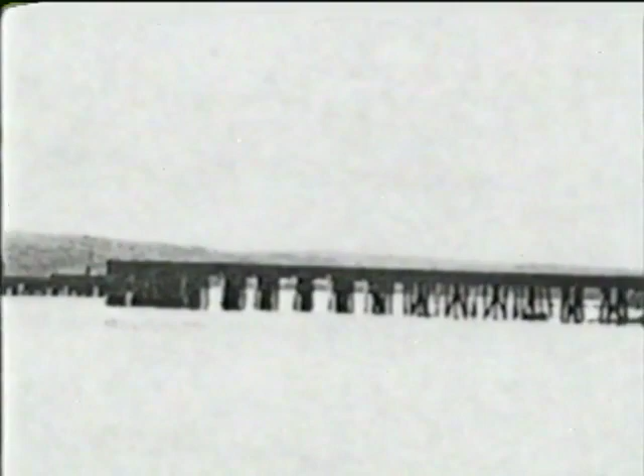The second bridge was built in 1892. It lasted hardly a year. There was no storm this time, no roaring wind. The bridge simply collapsed on a calm July night. The builders had tried to drive bridge pilings into solid bedrock.

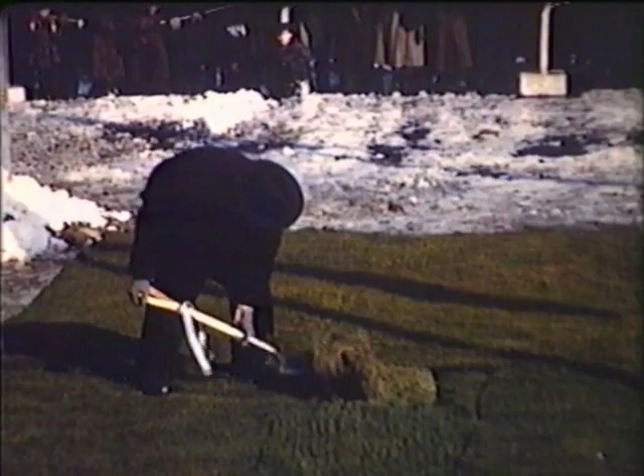It was not until after World War II that plans were laid for building a third harbour bridge. Angus L. MacDonald was the man who recognized the need for it. Post-war Halifax was growing, and harbour ferries could not handle the increase in traffic.

Returning veterans from the war wanted the good life that they had dreamed about when they were slogging through mud in Europe or sailing the raging North Atlantic in supply convoys. They wanted a good job, a home of their own, and an automobile.

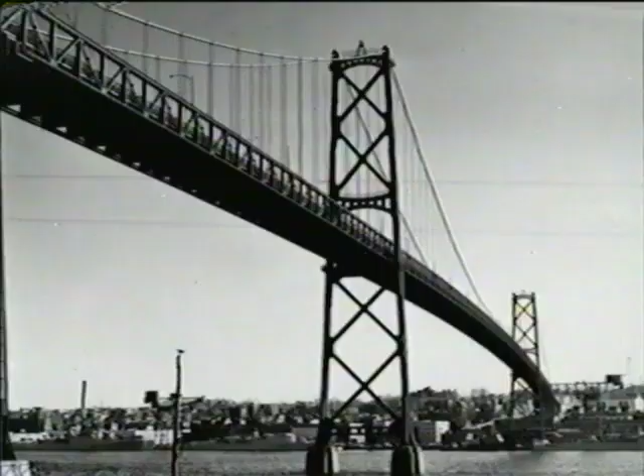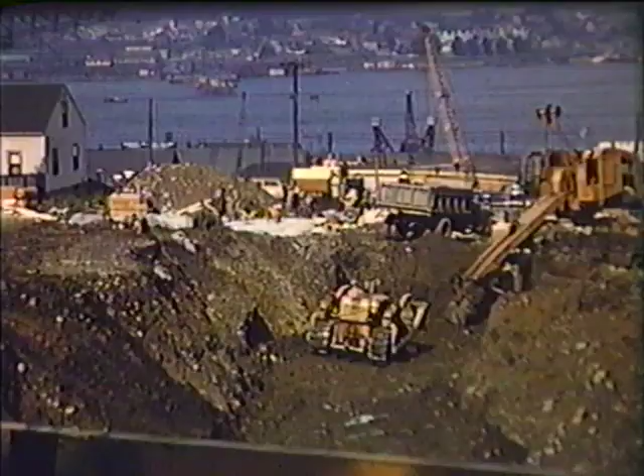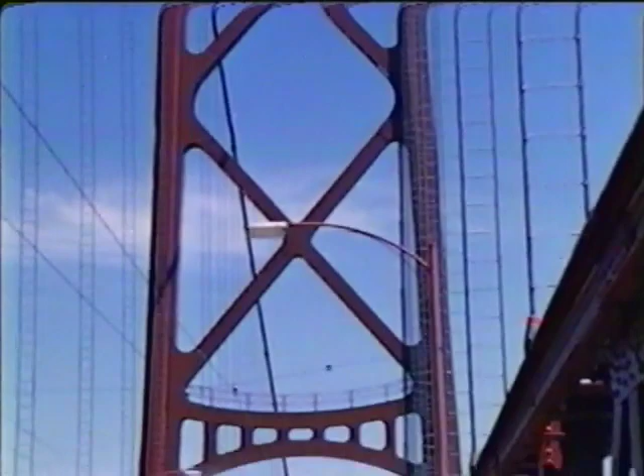For the generation still shaken by the Great Depression and the Second World War, the Angus L. MacDonald Bridge was to become a symbol of hope, a sign in the sky that they could span the tragedy and destruction of the past 2 decades and build a secure and prosperous future. But building the bridge would not be easy. And before it was finished, the Angus L. MacDonald Bridge would cost 6 men their lives.

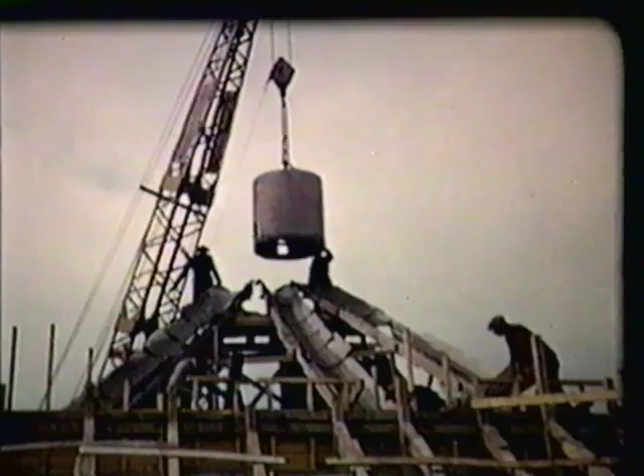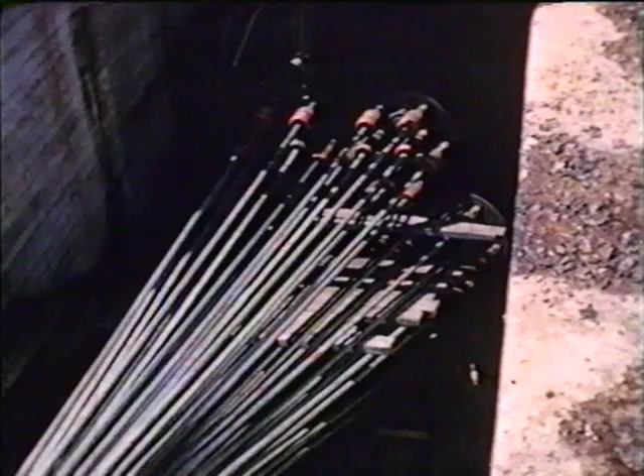The foundation was first. 2 massive concrete blocks, each weighing 20,000 tons, anchored the bridge on both sides. And in the case of a suspension bridge, the massive anchorages for the cables are sort of like icebergs. You don't see half of the mass of the anchorage when you look at them now, because half of it at least is underground. So they are very massive indeed to resist a very heavy pull.

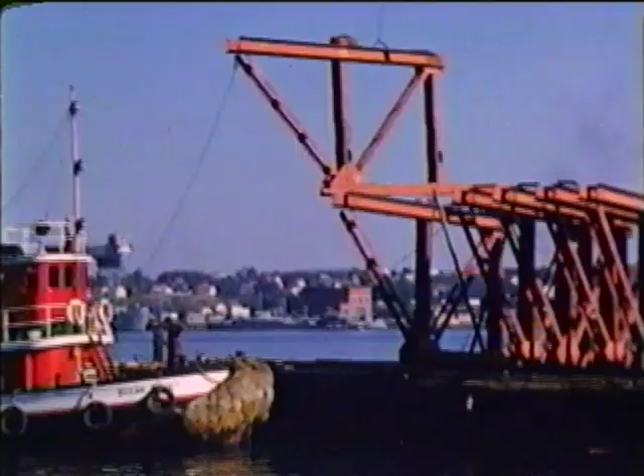People stood in awe to watch steel beams flung out over the water and then set in place and riveted. One span after the next extended from both sides at once. They were like arms reaching out for a handshake. So the bridge suddenly sprouted in 1954.

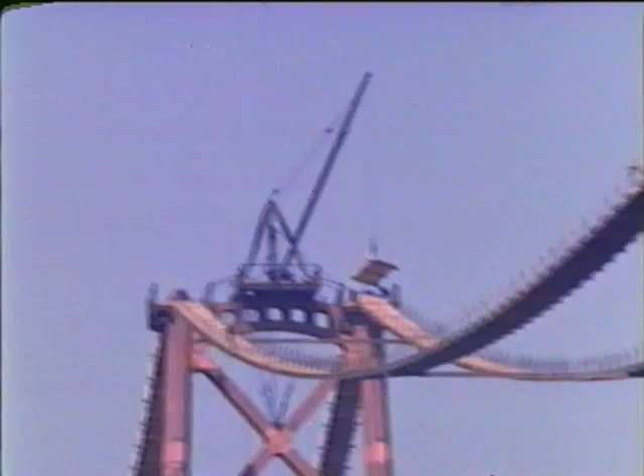By the late summer, we had the towers up and started putting the cables up. And that took about 3 weeks to put the cables in place. And then we started putting up the trusses, and the bridge took shape in about 6 weeks.

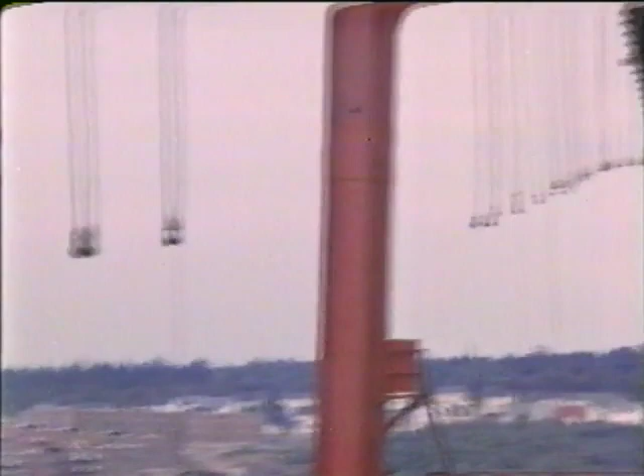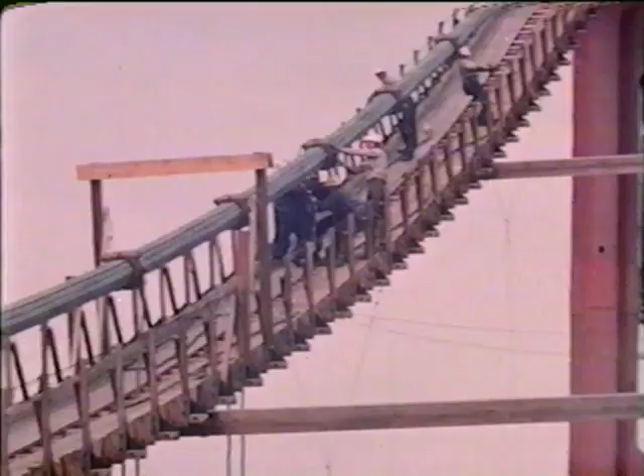Two main towers, each 300 feet tall, were strung with 72 miles of steel strands squeezed into these steel cables. Each cable contained 61 strands. The towers and piers carry the dead load of 75,000 tons of concrete and 8,200 tons of steel.

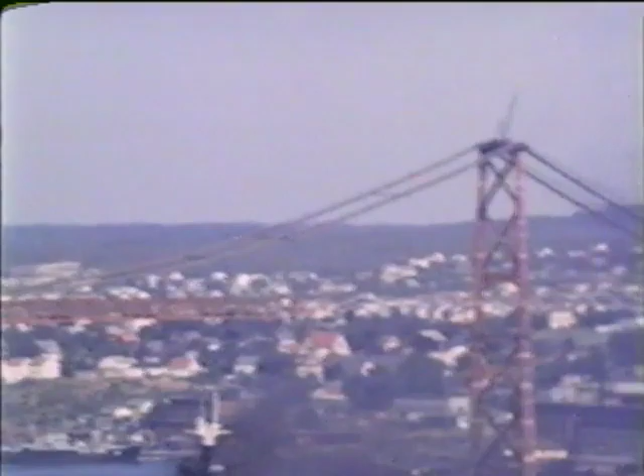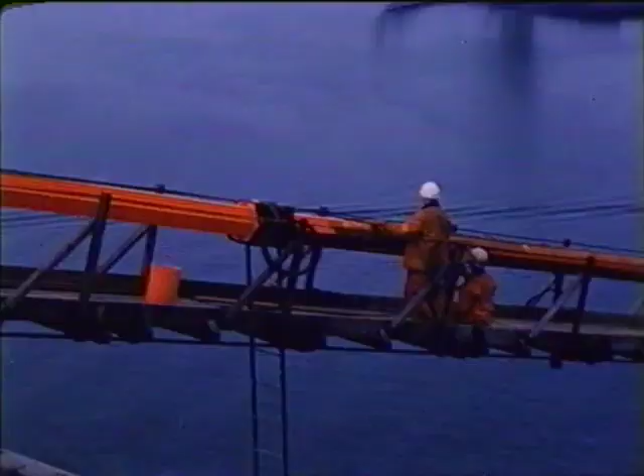Yet for all that weight, the MacDonald Bridge seems suspended in the wind as it stretches nearly a mile from shore to shore. Hugh Prattley was on site the whole time of its building. He was even up here with the ironworkers. For him, this was the top of the world.

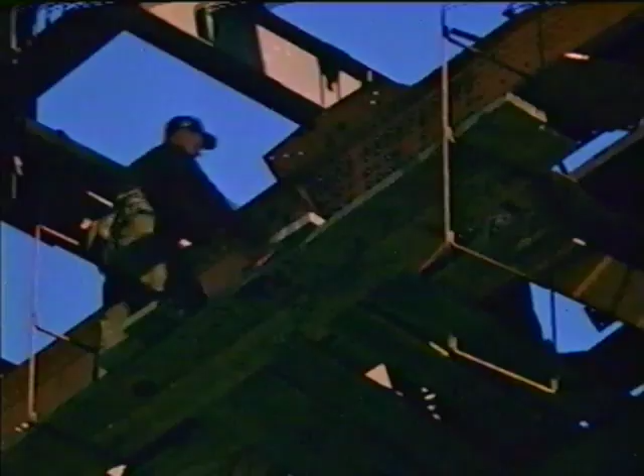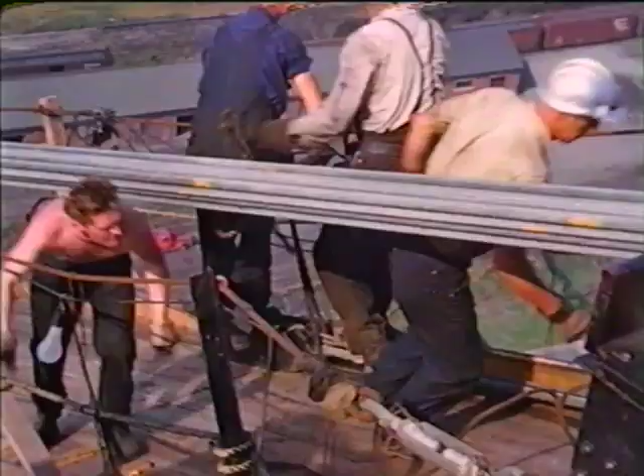From ground level, it looked as though these men were riding girders and trusses across the sky. They were iron men who pulled muscle from bone with the climbing and scaling to the tops of these towers. They were tough, and they were fearless. On July 3rd, 1954, a random wind caught one of them and threw him to his death 200 feet below. His name was Jean-Marie Boulanger.

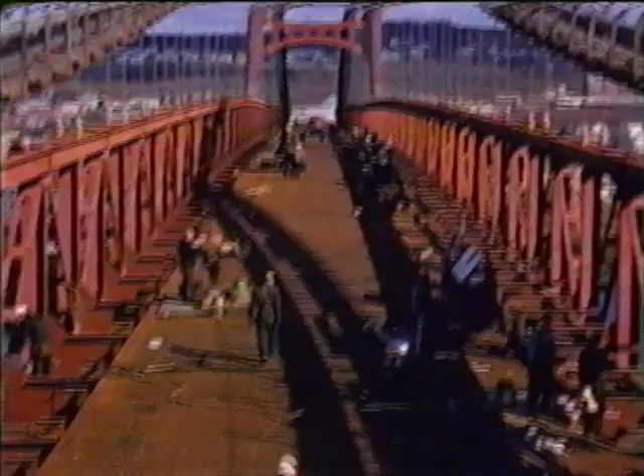But I actually witnessed one man hanging on for dear life because the catwalk was twisting badly, and eventually it threw him off. He couldn't hold on, and I saw him fall right into the harbor. It was a terrible experience for me to witness that. And of course, he was killed instantly, unfortunately, but it was best for him that it was instantaneous, I guess. By the time the steel grid deck was set in place, 5 more men would lose their lives in building this bridge.

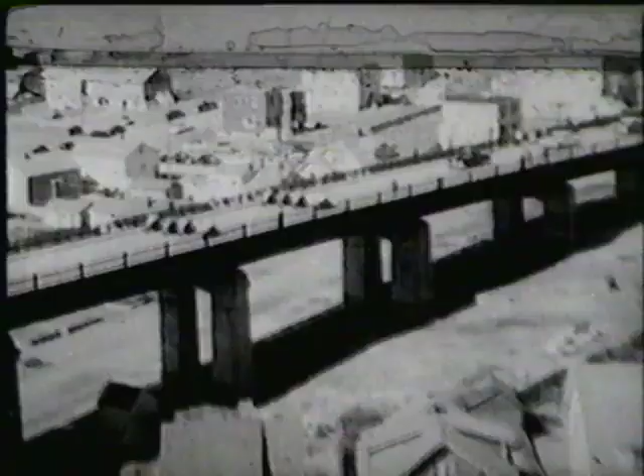On April 2nd, 1955, the Angus L. MacDonald Bridge was officially opened. Almost at once, the MacDonald Bridge proved its financial worth. The estimate was we would get up to 1 million vehicles per annum by about the 3rd or 4th year. In fact, we had 2.5 million the first year. Over the next 40 years, the bridge became an old friend to both Halifax and Dartmouth. Often, it was the focal point for civic celebrations.

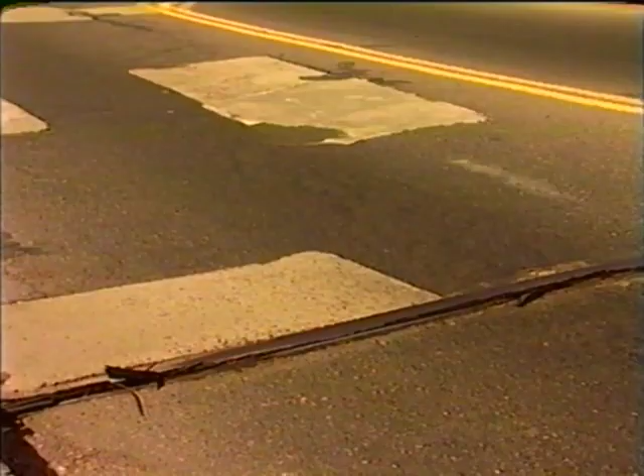Each day for 40 years, thousands and thousands of cars beat the pavement down to the steel decking. Time and the weather have worn the shine off the old bridge. During an annual inspection, the engineering firm O'Halloran Campbell determined that rust and corrosion have made the bridge a little frail and much in need of rejuvenation. The approach decks needed replacement.

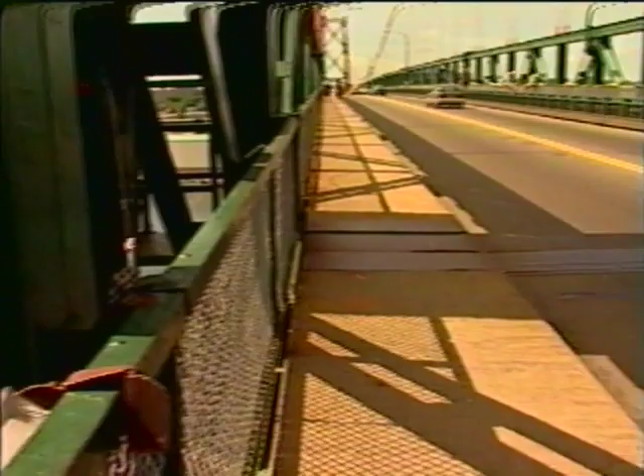So I began to think, well, if we're going to mess up the traffic, so to speak, by tearing up the approach decks and taking a year and a half or whatever length of time to complete the replacement of the approach decks, maybe we should do the 3rd lane because it had been talked about for years. The engineers determined there would be cost savings and time savings in expanding deck replacement into a 3rd lane project, which included the addition of a bikeway and a sidewalk. The engineering began in January 1996. And it'll actually be pre-surfaced.

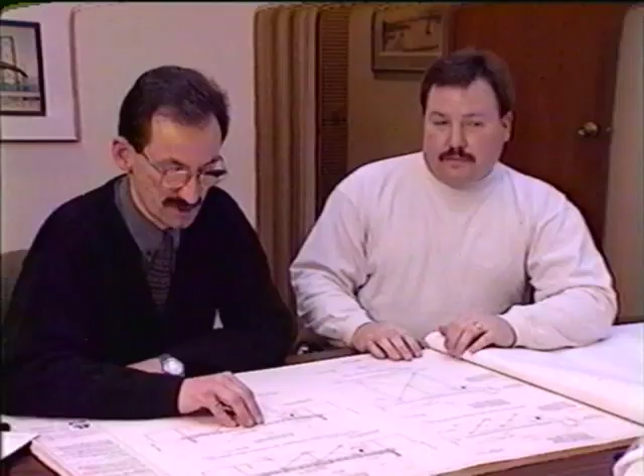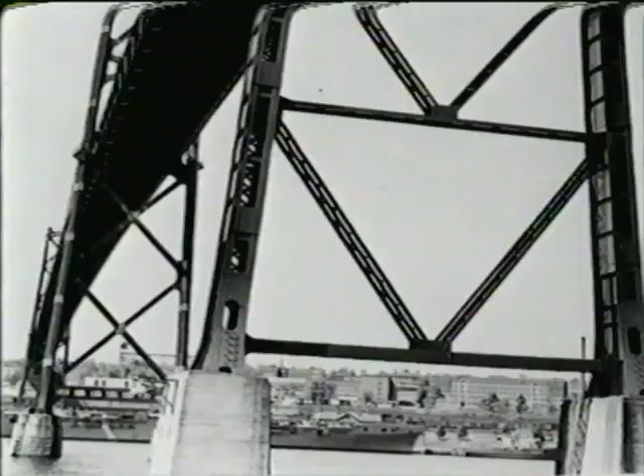There certainly were challenges on the 3rd lane project. One of the big challenges was how do we accommodate 3 lanes of traffic on the bridge from the old 2. That involves changes in loading. Load on a bridge is calculated as dead load and live load. Dead load is the load of the bridge itself, the concrete and steel. Live load is the traffic crossing the bridge. Together, they make up the total load the bridge was designed to carry.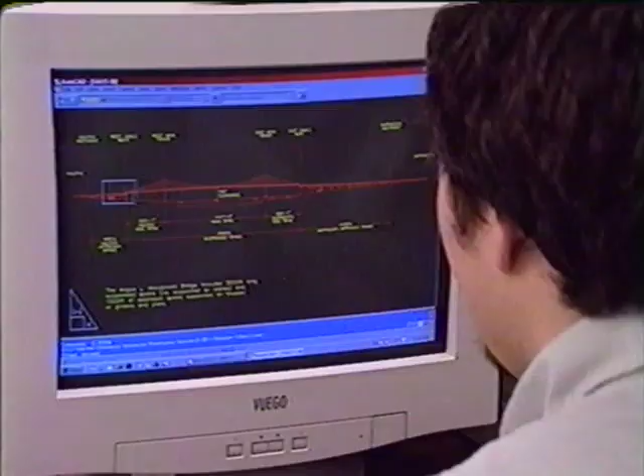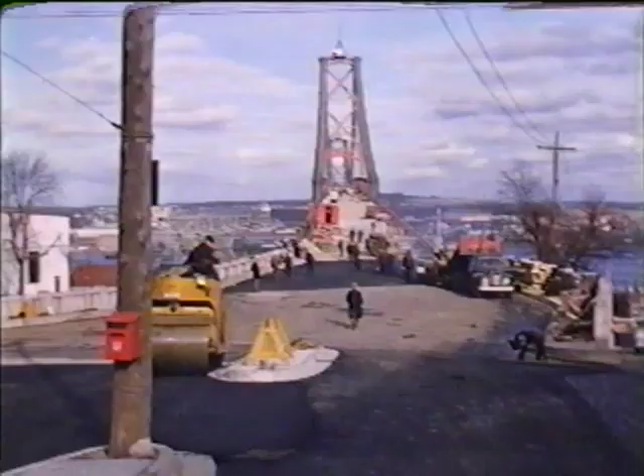O'Halloran Campbell had developed and engineered the method for adding an extra lane of traffic, as well as adding a bikeway and sidewalk without increasing the total load on the bridge. It sounds almost impossible. Now, in the case of this project, we had 3 advantages playing in our favor. The first was that when the bridge was designed in the early 1950s, it was designed for the normal mix of truck traffic. More recently, the approach roads, both on the Halifax side and the Dartmouth side to the MacDonald Bridge, were no longer designated truck routes, so the bridge was not used for normal large trucks. No trucks means that the bridge carries a lot less live load than it was designed to carry.

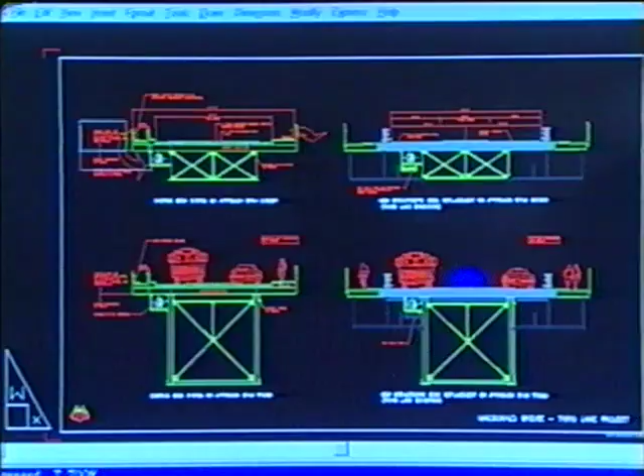The second item in our favor was that whereas the MacDonald Bridge was designed to take a 30-inch diameter water main, when the water main was installed, which was in 1971, it was installed as a 24-inch water main, so it meant that the load from the water main was less than it had been designed to be. In very simple terms, the engineers traded the calculated weight of truck traffic on the bridge and water through the water main for the extra weight of the third lane, as well as the bikeway and sidewalk.

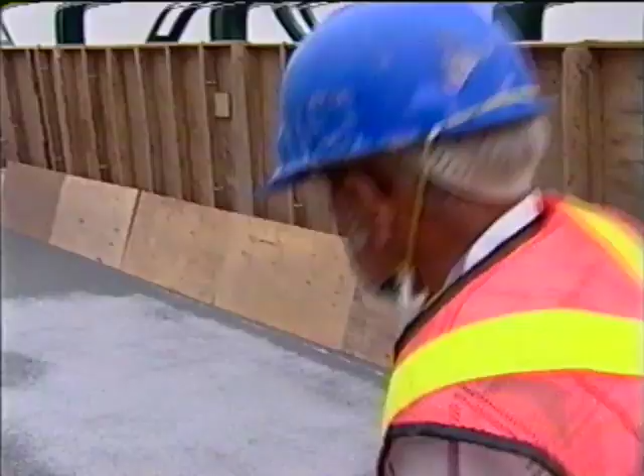A third advantage playing into the project's favor was the engineers' decision to use a lightweight epoxy wearing surface instead of the 1-inch heavier asphalt. Had we not been able to use those lightweight wearing surfaces, and for instance, had we had to accommodate truck traffic, then we would not have been able to move forward with the third lane project. Another factor was the use of a lightweight construction material called an orthotropic steel plate.

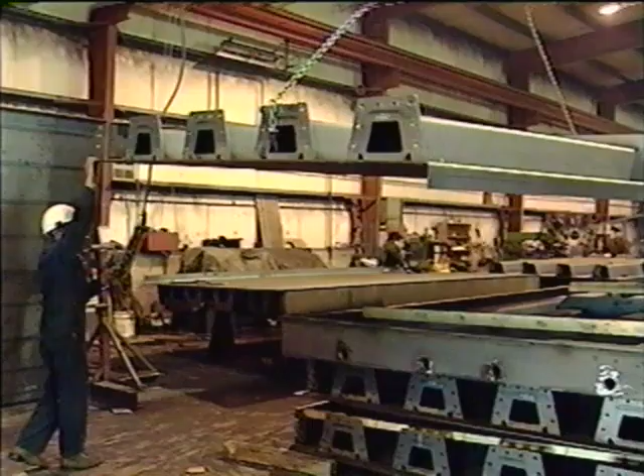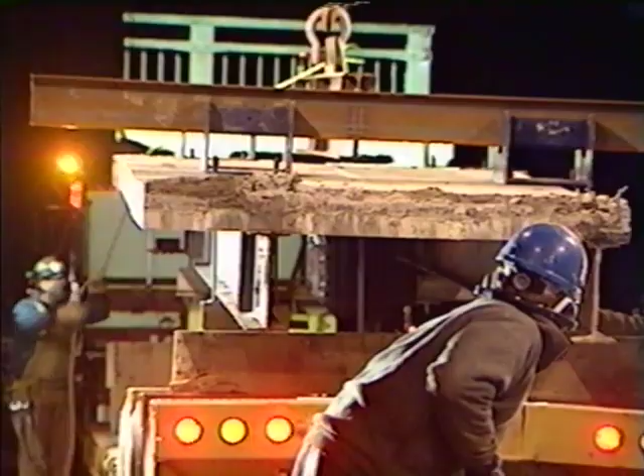In simple terms, it's a near horizontal steel plate, which is about 1/2 inch thick, and it has stiffening ribs running underneath it in the direction longitudinal to the bridge, that is, with the direction of traffic. The orthotropic steel plate allowed the engineers to design deck replacement one panel at a time. This new lightweight orthotropic steel plate would be used in the roadway area on the approach spans and on the

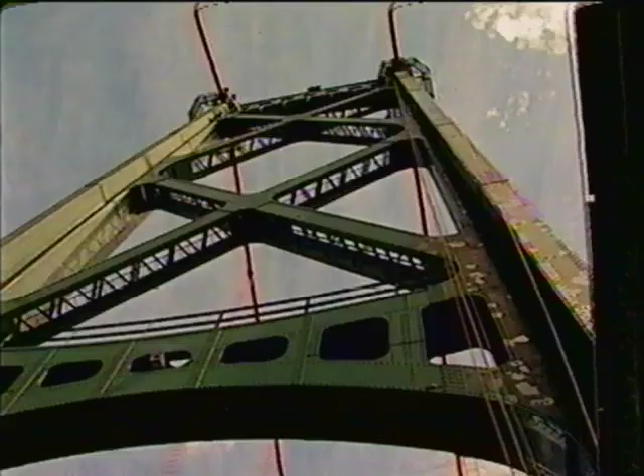sidewalk and bikeway. The next engineering challenge was this: where to put the third lane of traffic and where to put the bikeway and sidewalk. On a suspension bridge, the width between the stiffening trusses is fixed. To the average eye, there just isn't enough room to accommodate a third lane. O'Halloran and Campbell, however, did not see it that way.

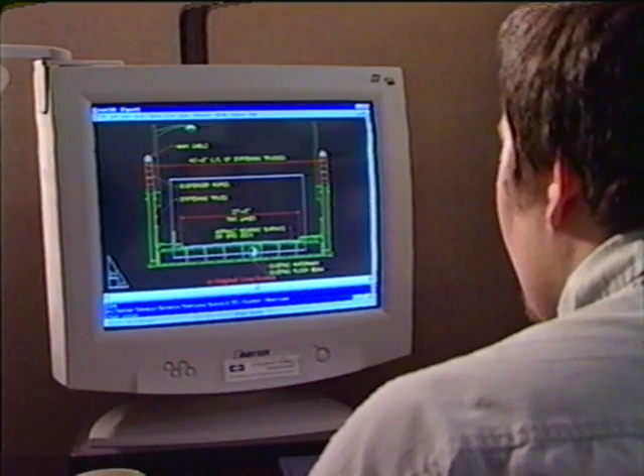What they saw was the width between the stiffening trusses accommodated 2 lanes of traffic, plus a sidewalk and ductway for utility cables. The sidewalk and ductway each measured about 1.5 meters wide. We were able to take all of those cables and put them underneath the deck of the bridge in a

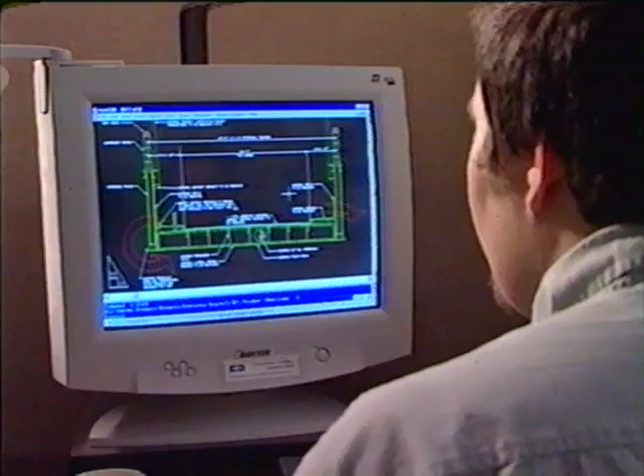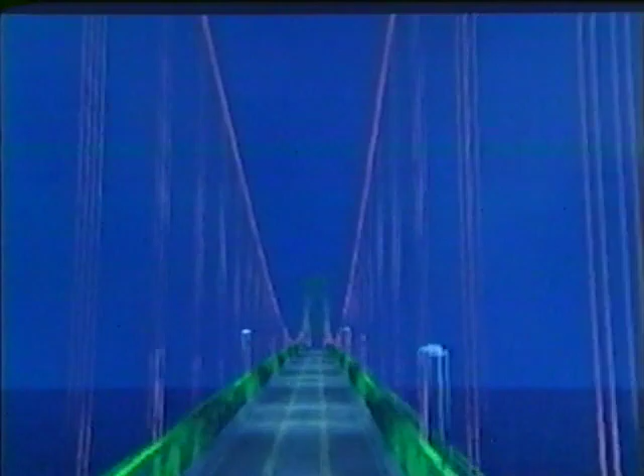specially made cableway. By taking the south sidewalk and converting it to a cantilevered structure outside the main truss, and doing an exactly similar thing on the north side with the bikeway, we were able to open up the available width inside the trusses. Cantilevering the bikeway and sidewalk from the bridge structure provided the next big challenge.

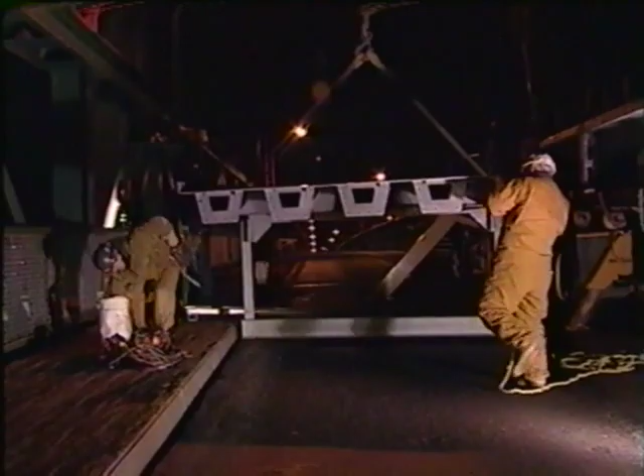It all may look good in a computer graphic, but how well will the bridge and these extensions endure the high winds that blow down Halifax Harbour? The bridge, of course, has been standing there at that time for 40 years and had survived a few hurricanes, and so we knew it was pretty solid, but we didn't know what the sidewalk and the bikeway would do to the wind resistance.

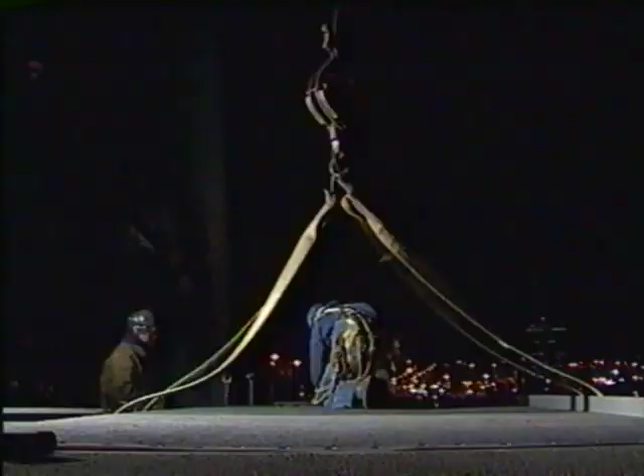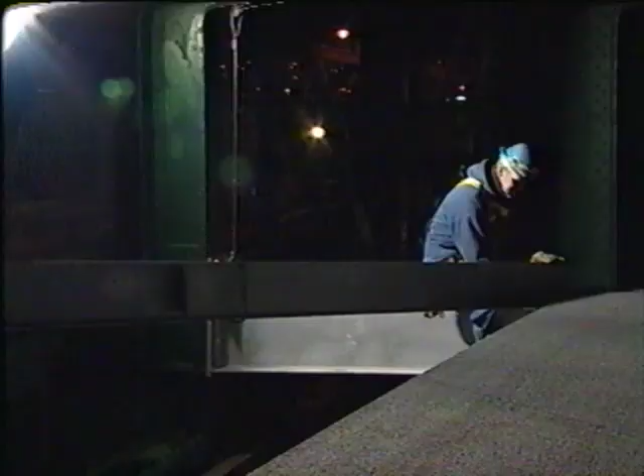Come on down. It was necessary to do aerodynamic modeling, and it was found, interestingly, that the performance of the bridge was better if we had symmetrical cantilevered structures. So that meant the sidewalk and the bikeway could both go ahead as proposed, and they would each balance the other and give better aerodynamics. Turned out to be a safety factor. We had actually improved the safety of the bridge.

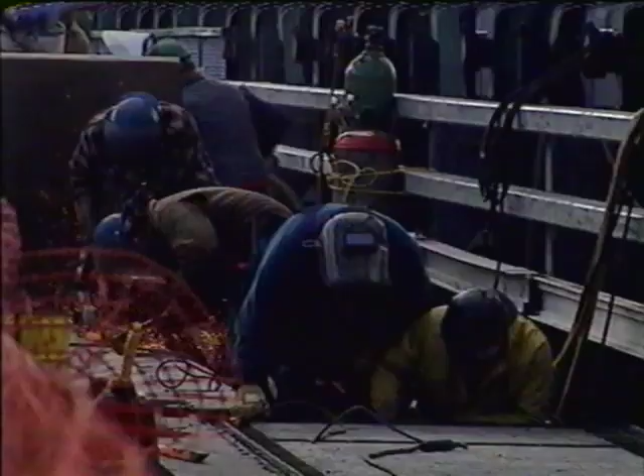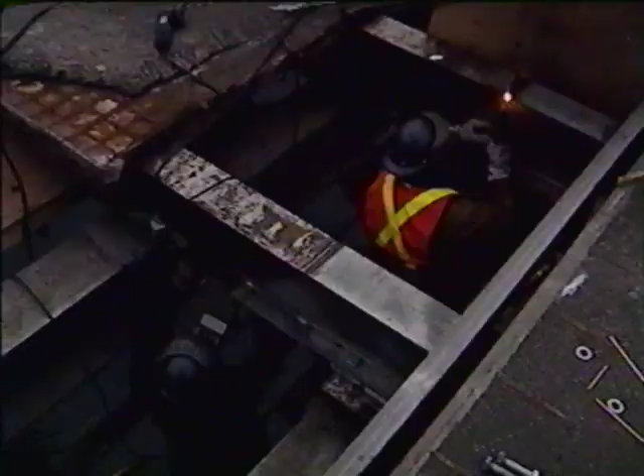The engineers were not the only ones with challenges to overcome. The joint venture of Walter Construction and Cherubini Metalworks had a significant challenge of their own. They had to renovate the old bridge within very strict time constraints. The most difficult was the replacement of the approach span roadway decks.

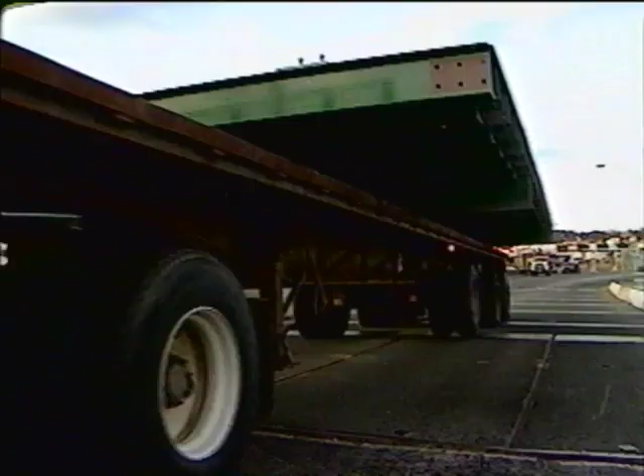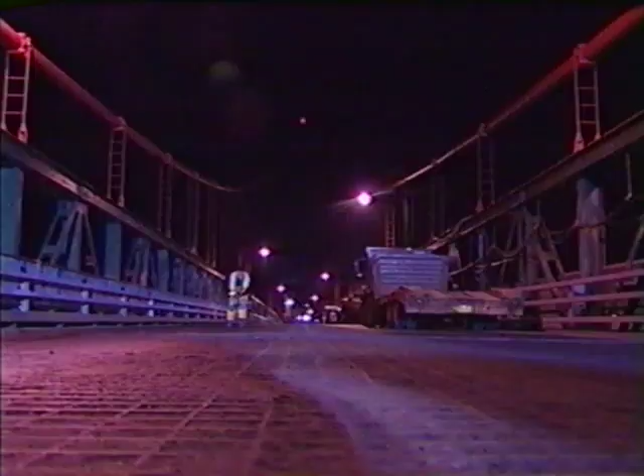We had to take off the old existing reinforced concrete deck and replace it with a new steel orthotropic deck panel. Those replacements had to be carried out overnight between 7 p.m. and 5:30 a.m., which was the only time at which we could close the bridge to traffic. Getting those panels fabricated and in place through those time periods was a significant challenge.

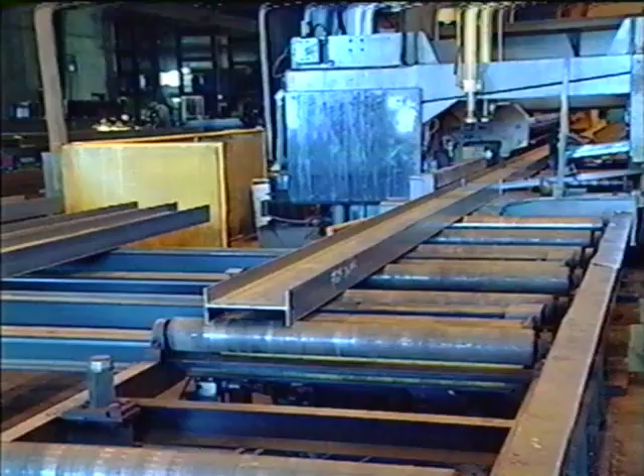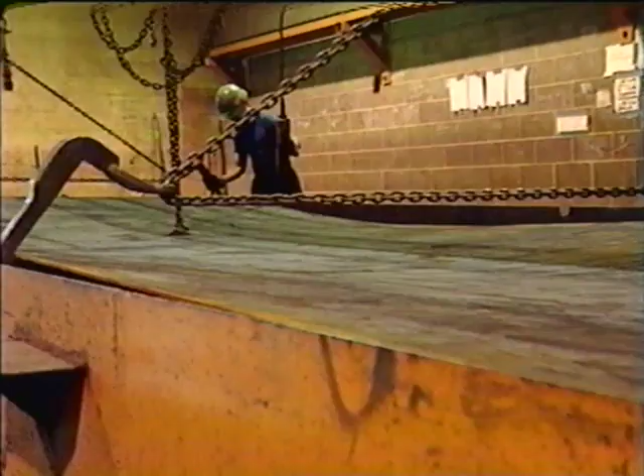To meet both the daily and project completion deadlines, Cherubini had to pre-assemble all replacement sections at their Dartmouth location. Cherubini welded 17 steel plates into a single unit that measures 40 by 17 feet. The ribs were fabricated, again, from flat steel plates. They were cut out on a plasma machine to cut to the profile of the rib plate.

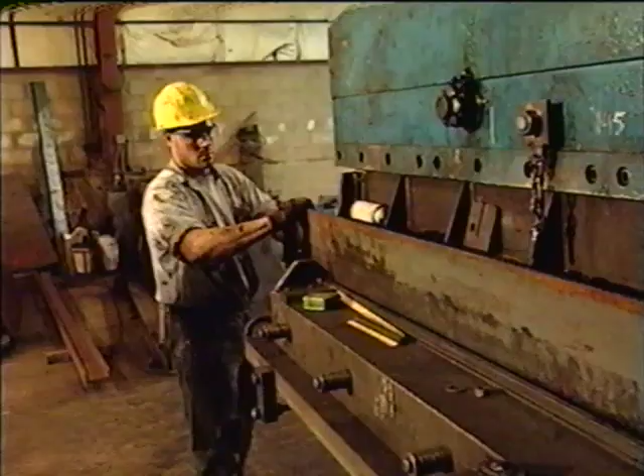A plasma burning table is like a cookie cutter for steel plate. The steel plate is submerged in a water tank to reduce heat input and thereby reduce distortion in the plate. A bending machine bends the rib profile into the desired shape. Using a traversal welding machine, Cherubini attached the ribs to the deck plate, which is equal in width to 3 lanes of traffic.

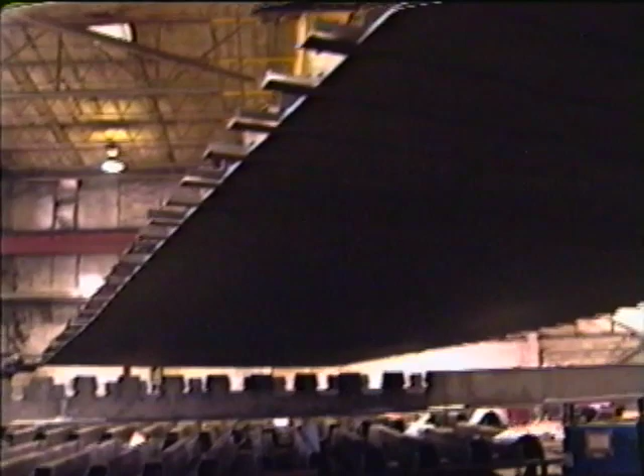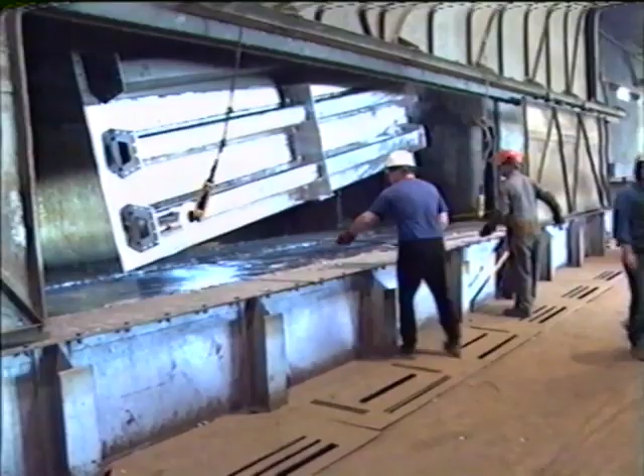The sidewalk and bikeway panels were also fabricated in our Dartmouth plant, and they were trial assembled to each section of the bridge as we progressed through the work. That allowed us several advantages. It mitigated the risks of weather. It also allowed us some schedule advantages because those could be built off in the shop while we were doing other things out on the bridge.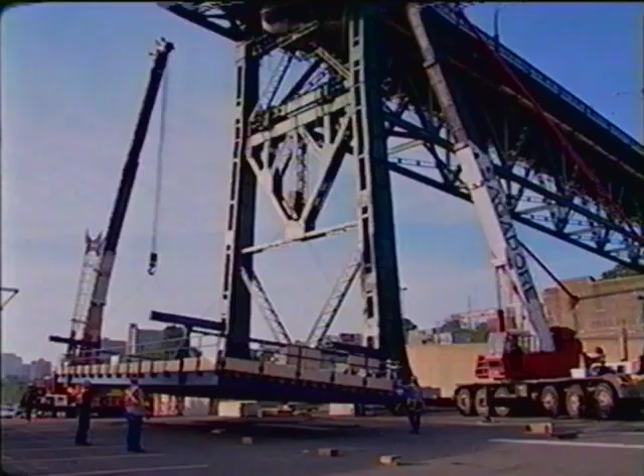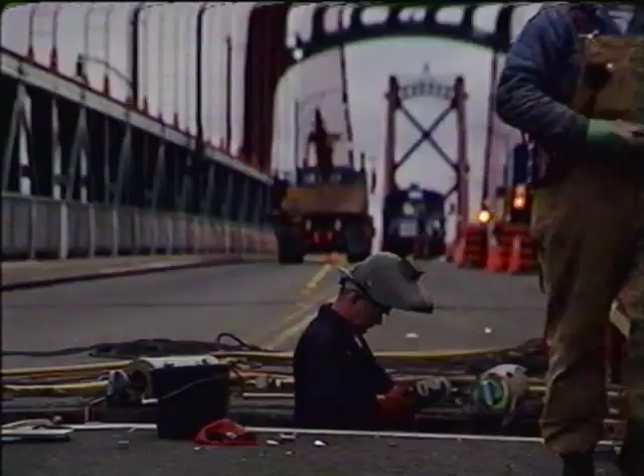Walter Construction also designed special scaffolding to give their workers safe, unrestricted access to the underside of the bridge. The overnight installation of the deck panels required the logistics and clockwork of a military engagement. We developed a schedule for the overnight operations basically on 15-minute intervals.

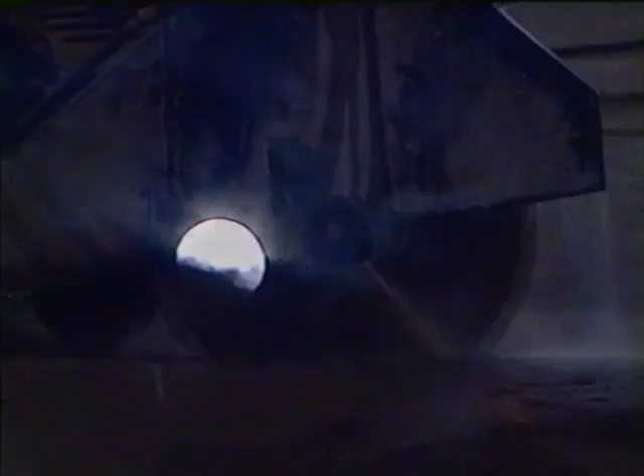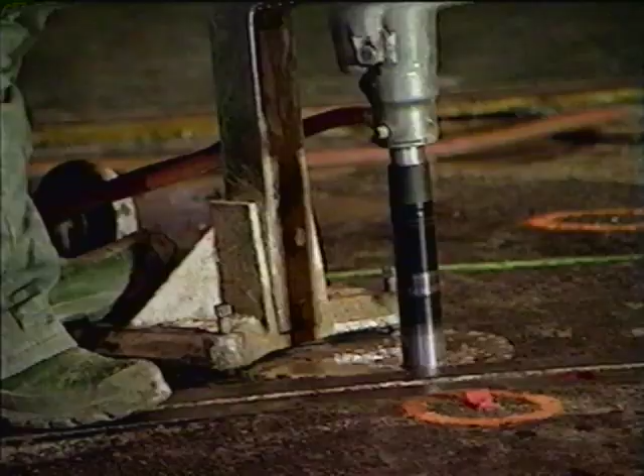We would go out with big electric saws and core drilling machines, and we would cut the bridge into 2 panels, 10 feet long, the width of the bridge, which was effectively 40 feet. And we would do that the night before they were to be removed. And we would also core drill those panels with holes so that we could put a steel plate over them the next day and bolt them down and hold them in place.

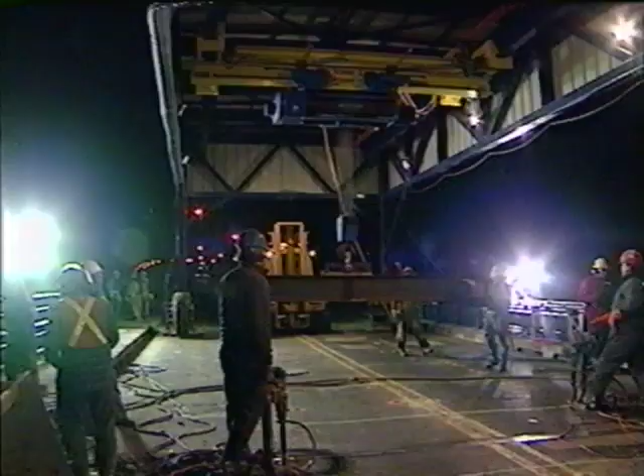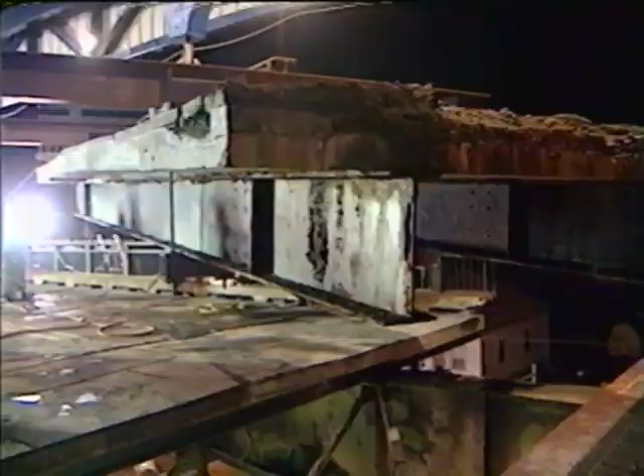Walter Construction also designed a specific type of crane for lifting out the old decking and lowering the new. It's called a straddle carrier. Each night, they rolled the straddle carrier onto the bridge and lifted out the old decking. And we would do that for both panels, and then that would leave us the access to bring in the new orthotropic steel panel and drop it in place.

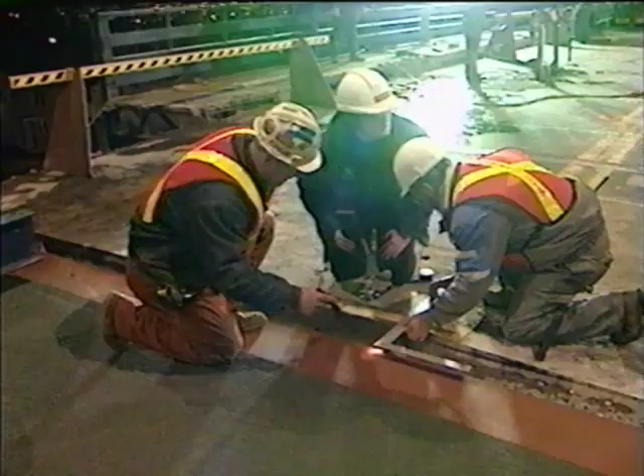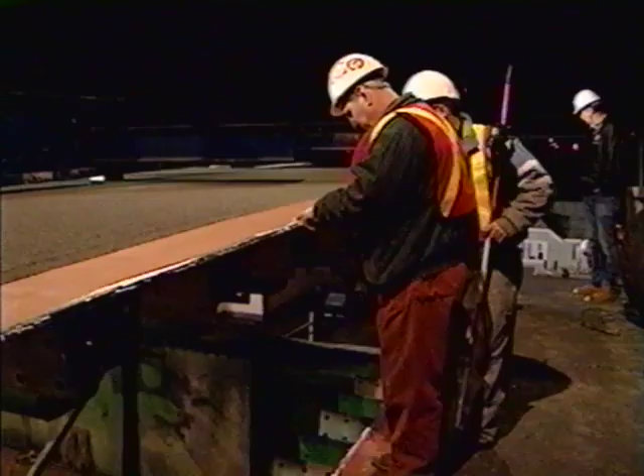The engineers are on site full-time to make sure each panel fits within acceptable tolerances. Put it on the first one and we'll check it. We had to be within basically 1/8 of an inch in a running dimension at any given time. And there were other considerations as well. We wanted to keep going in a straight line because if you start deviating off our intended line by even 1/4 of an inch, by the time you jump up a number of panels, the bridge would start to run off in the wrong direction, and we didn't want that to happen. To remain on schedule, the joint venture had to install 1 deck panel per night.

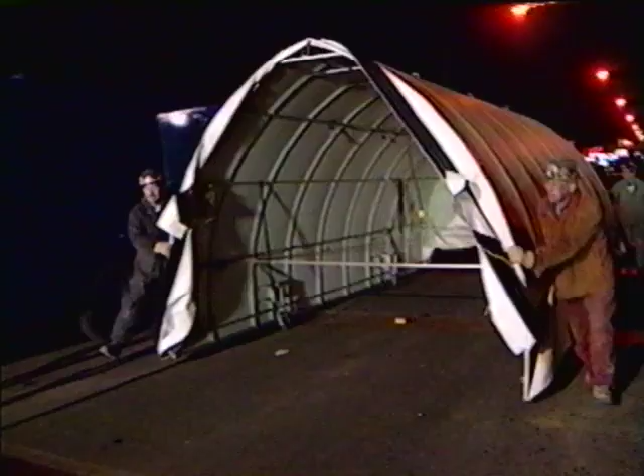Installation of the orthotropic panels required a welding procedure that had to be done under controlled conditions. The Angus L. Macdonald Bridge is hardly a controlled environment. If not rain, the high winds would have made it difficult to do the welding. So in order to overcome this, we designed an enclosure, which we referred to as the igloo. It was an aluminum frame covered with plastic, 10 feet by 40 feet long, and we rolled it into place, closed it over the joint, sealed it up, and the tradesmen worked inside that. 4 crews of welders worked simultaneously to get the weld done in time to get the bridge open.

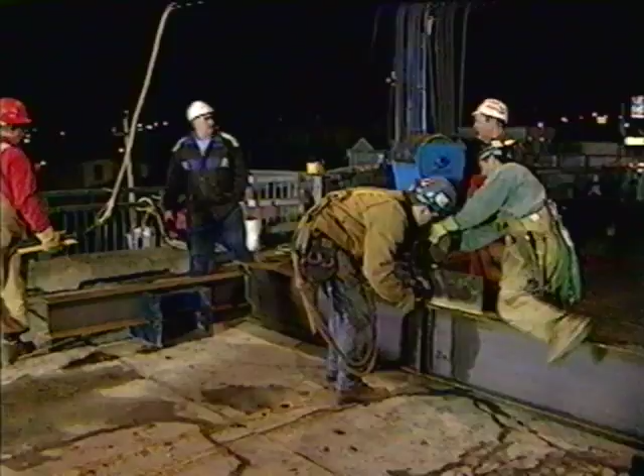Another panel, another night, and another race against the clock to complete the work and have the bridge opened at 5:30 a.m. for rush hour traffic. The installation of 128 orthotropic panels was on schedule. In September 1999, the work was done, 2 months ahead of schedule. In hindsight, it didn't seem all that bad, but I know at the time it was a very aggressive and very tight schedule. But you know, we pulled it off. The end of the job.

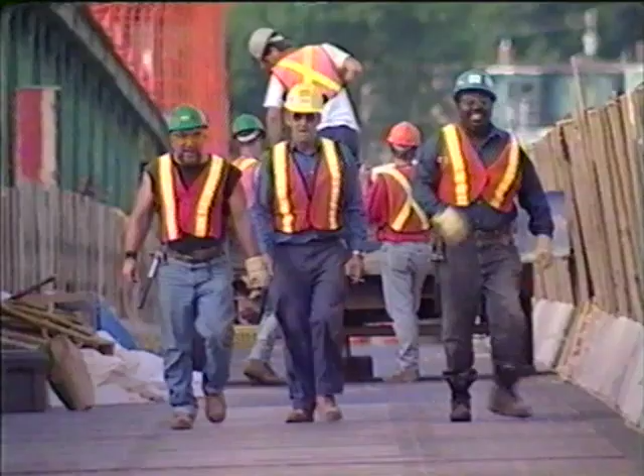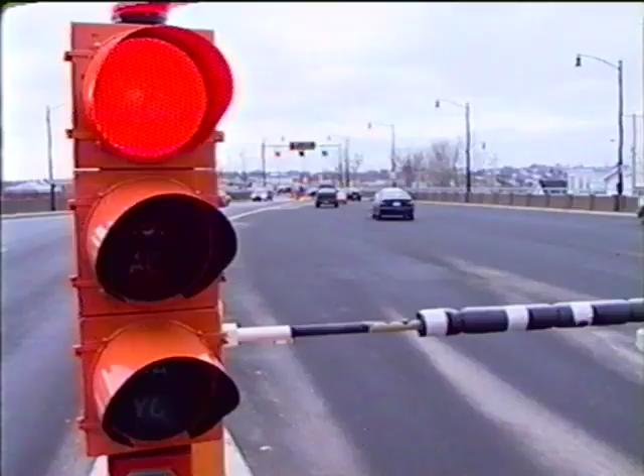Most of the people with Walter Construction are local people, and this is a major project locally. We're very proud of our role. It is a big advantage in terms of an improved link across the harbour. So yes, we're proud of it, and we're very pleased to have been associated throughout the length of the project.

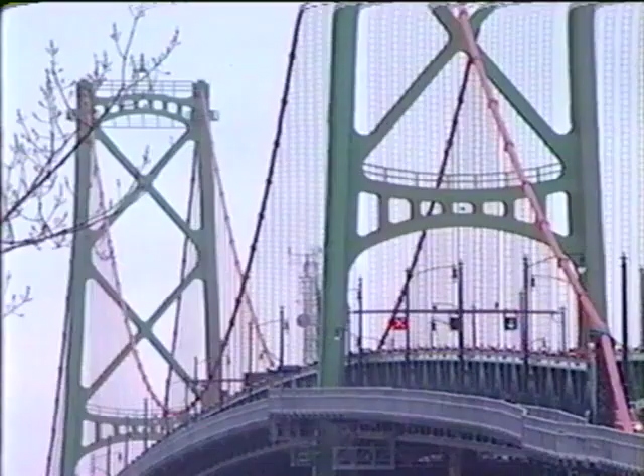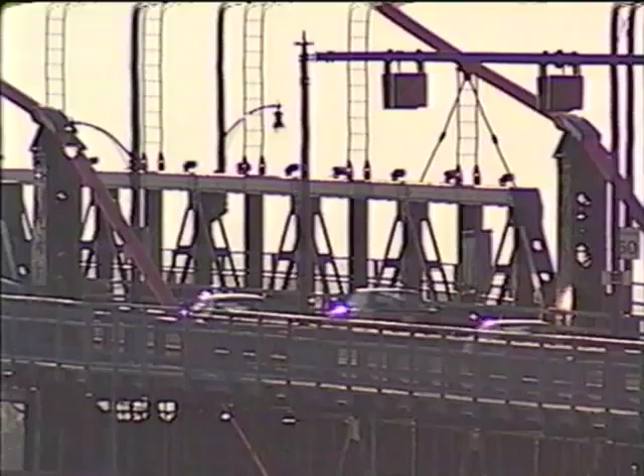We put a deadline of November '99 on them for completion, and they not only met that deadline, they exceeded it. On October 31st, 1999, the new Old Bridge was officially reopened. In 1955, one generation built this bridge as a promise to the next, that this region of Nova Scotia would prosper and grow. With the addition of the third lane, a similar promise has been made to those generations that will follow. And this partnership of engineers, contractors, steel fabricators, and bridge commissioners has ensured that our new Old Bridge keeps that promise well into this 21st century.